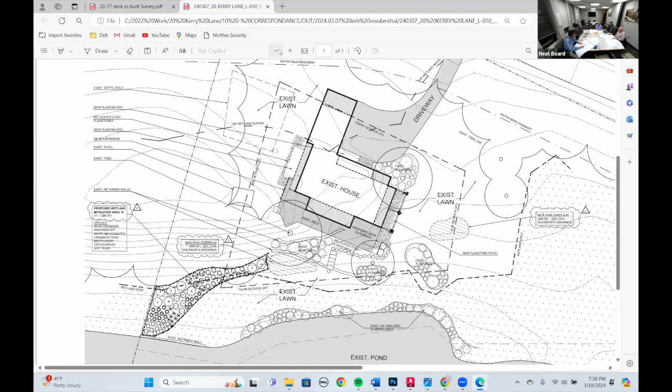Who did the original? The original boundary is, you can see it right here. No, who was the person that flagged the original? The original one, his name was Otto Theol. I had spoken with the owner, Mr. Rochlin, about the line. And I said, I'm just curious to get a copy of his report, right? Just to justify that line.

And to be fair to him, it's possible, because I don't think that wetland is necessarily tied to this. It was just another spot on the property. And that's why I wanted to see the report, because what month did he do it? When did he do it? It's possible that it was just missed. That's all. And correct me if I'm wrong, Dennis, but most of this is on the neighbor's property. But like we said, it's the tip of a carrot.

Who knows when we actually flag this thing? Even if it was on the neighbor's property, it would be a very tiny little tip. You think you would have seen it. It would create a buffer problem. Yeah. Am I correct, just estimating, that would then place pretty much the rest of the property in the buffer as well? Yeah, and the garage, which is part of the proposal, right? Well, that was just the point.

Yes, and per our earlier discussion with James McManus, there's two things going on with our development as well. This is why we're having this meeting tonight to discuss it, because we want to show our due diligence, and that we've been focused on trying to get everyone on the same page as far as this renovation. And so we want to flag this area. We do all agree that it's wetlands.

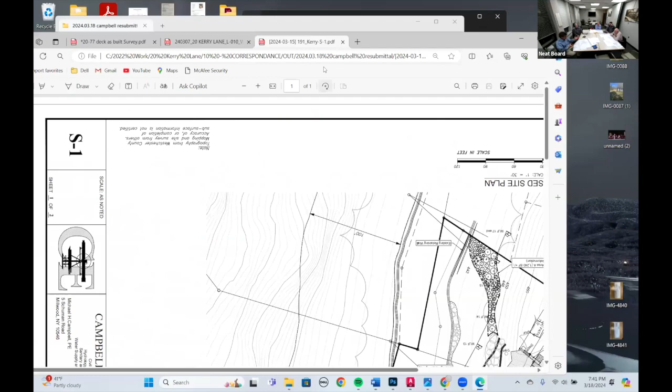And I told him, well, just about every pond, in my opinion, that I see in New Castle is man-made at some point. I said, the configurations are not natural. They happen to be within riverine or wetland systems. You're not gonna go dig out a pond in a dry area and then feed it water through a... Right.

Those, I mean, they were features that people wanted. They wanted open water. But what he was trying to, I think, say was that the features in those soils in the area outside of the pond, although they may be hydric features, they are relics of when they were submerged as sediments in the pond, but not necessarily indicative of hydric soils now.

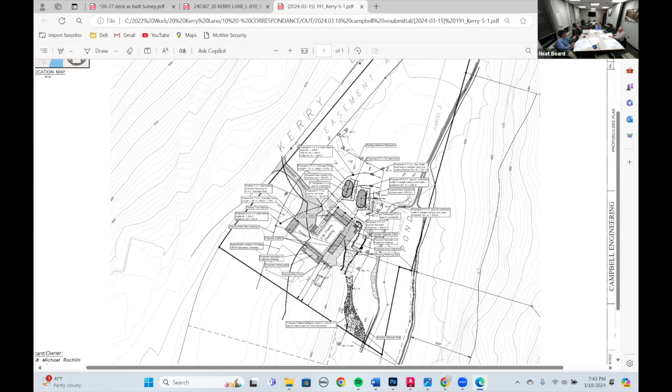Can you just say that again? Right, I mean, I myself in my experience hadn't... Does it matter? That's why I want to take a look at the manual. That's why I want to see, when we meet out there, what exactly he's looking to advance, and then if that would or would not change those conclusions at the end of the day, because I didn't have an immediate response to it, because I didn't investigate the area. I hadn't seen it. Well, he wants to present next month to all of you.

But the only reason why, from an architectural / engineering standpoint, and Michael Campbell can speak to this, is that we were planning on talking about our engineering from Michael Campbell today, because that is what was missing from our application last time. But this is a discussion, and correct me if I'm wrong, Dennis, does it move the needle 100%? No. But does it potentially give us a little bit more flexibility as far as where to put these rain gardens? If the wetlands delineation line is slightly different, do we potentially have some other opportunities?

Because from the client perspective, putting 2 big rain gardens in the middle of one of their only useful areas of lawn isn't very attractive, right? So if there are any potential other areas. Hold on, and to take a step back again, I believe what you're, and this is fine, I just want to corral this. What is up on the screen now was not submitted. Did you guys get a look at this? Was this submitted? I'm trying to remember. It is. Okay, so I did get it, okay.

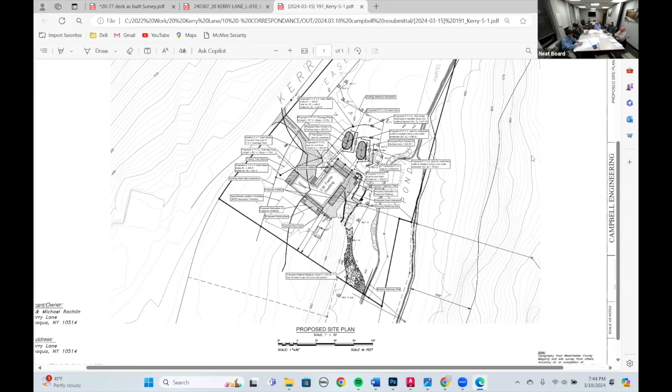So I think this reflects sort of a second edition. The first edition, as you saw, I think showed 1 rain garden to the side of the house and 1 rain garden to the rear of the house. But the problem that I was going to have with the rain garden to the rear was that, although the basin part could potentially be sited out of the wetland boundary as it is depicted now by Otto, the grading and I guess the little spillway for the overflow was all going to be disturbance in the wetland.

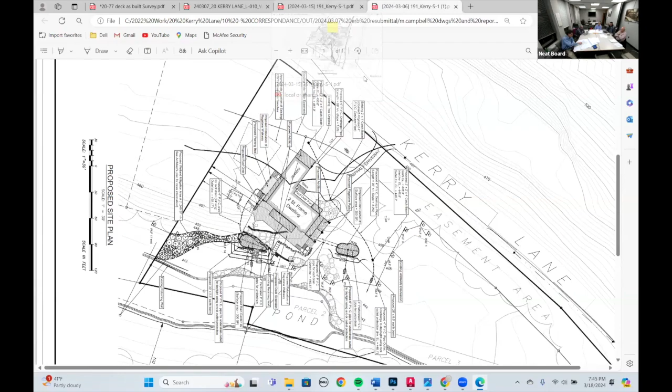And since stormwater is a pollution control device, you're really not supposed to have any of it in the wetland. So then this sort of became that. I'm sorry, she's showing the first one. Oh, yeah, I have both on the submission. This one is the second one. That's fine. And then the second one took that rain garden out and then in essence put the 2 side by side to the side of the property, out of the wetland limits as delineated by Otto.

Is it even worth looking at any of this if the wetland delineation is up for grabs? I mean, Mike Campbell is on. Mike Campbell, if you want to say anything to the effect. Well, I think the one thing that I thought might be of value is, I know at the first meeting, there was a discussion about looking to reduce coverage. Not necessarily reducing the project with respect to the living space, right? Right, it was the decking, patios, deckings and whatever. My question then at that point was, where does a garage fit into that discussion?

You guys had never vetted that, and that was something that I said to the applicant, if you did come tonight, that may be worthwhile, because now you're proposing for the first time in front of the board something that is in the wetlands buffer that wasn't prior, based on new information. And how does that impact the discussion? I said that to me is worthwhile to bring up. I mean, before we get, yes, I agree, Dennis. I think just to go back to where we were the last time, again, about moving the needle. Understood that there is this area we want to flag, and will, on the southwest corner of the property.

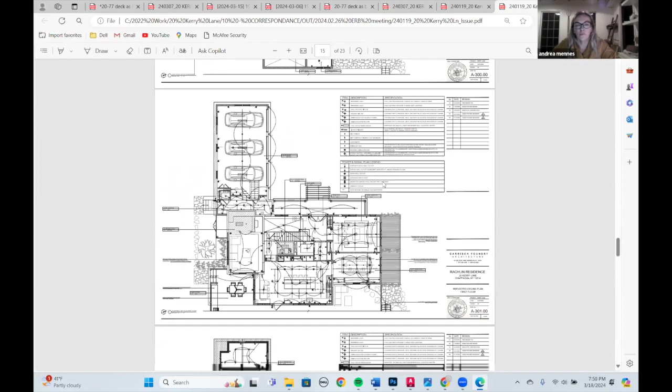We already passed the architectural review board, and let me just pull up our drawings again. Sorry. This is what it looks like now, if we take off the garage and don't do it as part of this application. I won't speak for the client, but I think we really want to do a small improvement to this house as far as square footage.

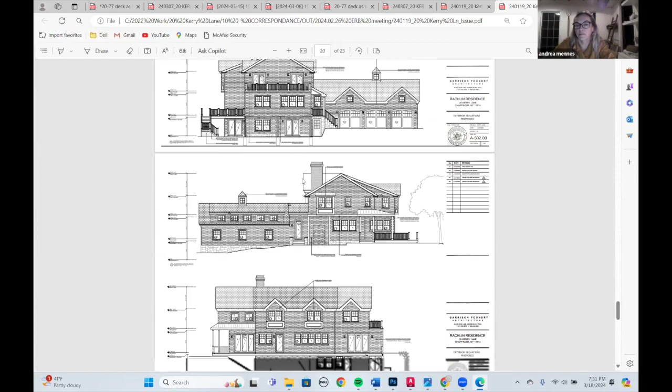And this is an important one, to have a 3rd bay, because they're going to be adding a lot of value and money to this project. And I don't think it's something that is easily taken out because it's an important feature. And I also think in general, the actual square footage that we're adding is not that significant. So if we look at it, it's a very small amount of disturbance actually for this project. You get it.

So besides the conversation, what else is up for discussion for this? Well, I think the only thing I'm gonna have to do is obviously consult at some level with counsel, because you have a wetland delineation here. That generally represents what was presented for this property in 2018, right? And then this one delineator has an opinion. There'll be a second delineator that's gonna have another opinion. I know what my role is, but does that change affect anything that's going on in here?

I think the only thing that it would change is that now the option for one basin to go to the rear of the property and avoid wetlands entirely, if indeed he has to do further investigation. But if Mr. McManus is just looking to pull this right up against basically the water line, then the rear opens up in terms of not being considered wetland. Isn't this the one we're looking at here? I don't think that is preferred by the client, so therefore it's worth investigating to see if they could put one of those to the rear of the property. So there's that question, and then there's the garage.

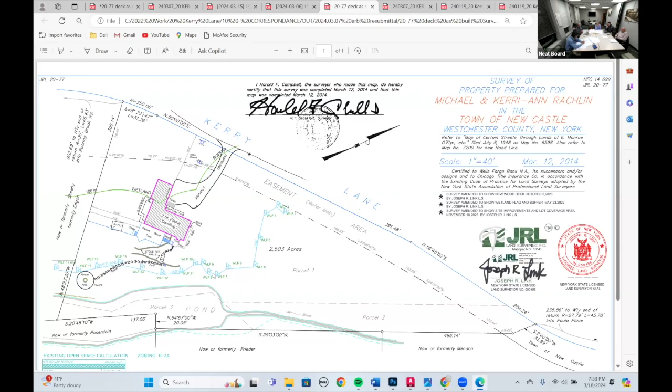Yeah, and then I think, as far as our mitigation that we presented here, our clients want this project to be a success, we want it to be good to the environment, we're happy to do whatever it takes. I guess that's why we want to do this due diligence for everyone. And if there's the potential to add more wetlands mitigation to offset this new area, we would be all for that. And I know James was going to recommend some areas that we could potentially suggest as mitigation areas.

And then the line delineation is a to be determined issue. And I guess largely this whole discussion is almost a to be determined issue for next month. But we do need to look at these things, and we want to be diligent, and our clients want to build an offset however the board and everyone deems proper and necessary.

Right, and just so that you know, what Mr. Horowitz is saying, this is the exercise when it comes to wetlands. All regulatory agencies, the planning board, the ERB, DEC, Corps of Engineers, whatever. The phrase is avoid, minimize, mitigate. So the first option that's always looked at is, does it have to go in the buffer?

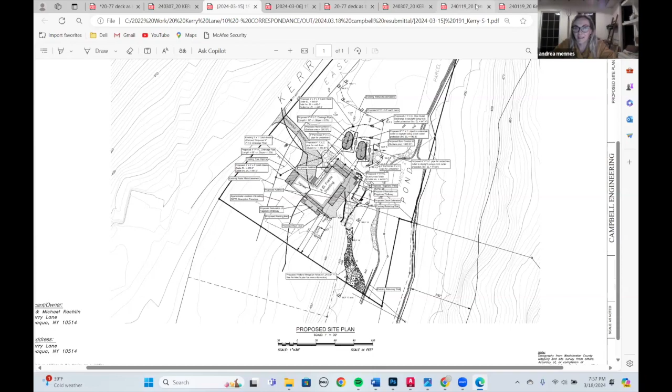I mean, if we think about it, it's deceiving because you think, here's this big house, but really what we are actually adding and disturbing for this is so small. It's 1260 square feet. So the mitigation area, I'm just clarifying, we had it as 1,240 square feet, and I thought that didn't include the fire pit and the proposed garage addition, because that was out of the buffer.

No, it's all here. So basically this diagram shows what we're trying to also describe, that much of this area is already disturbed area. So everything in dotted is brand new. So the garage is one area where it's not over existing.

But, and we did update this, it was 1,240, but if you recall last meeting, we landed at the end of the meeting where we wanted to add the fire pit back in because we can't count that. So we added it. So this is the total square footage when you think about it. But I'm just trying to get this straight.

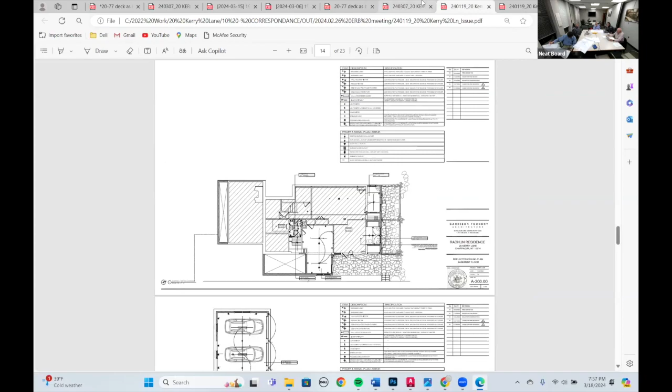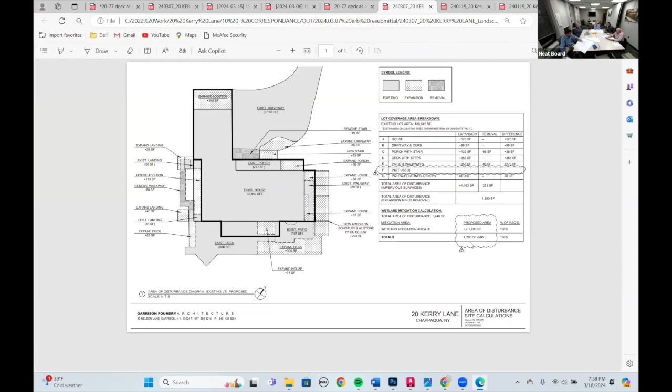I'm looking at the plan from 1/19/24, and it shows kind of the same configuration of the mitigation, and it lists it as 1,240 square feet. And then this submission, which we received, I guess, March 8th, that was stamped, it's the same configuration, and it's 1,240 square feet. So all I'm asking is, the math's not resonating with me, because it's the same before the garage and after the garage. You know what I'm saying?

Our first submission was in December, actually. Right, but this is the January revision where we didn't have the reduced coverage. Right. We didn't have the meeting in February, and then the last meeting, we discussed the 1,240. And you guys had a mitigation plan that accounted for the garage, even though the garage wasn't in the buffer. We always accounted for the garage as our square footage, as our total. And you can see it here, we have the numbers written.

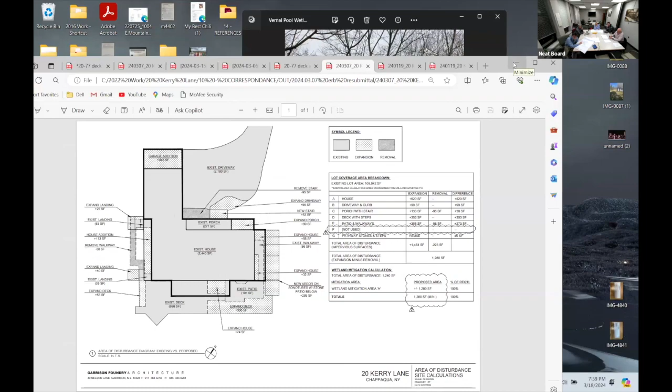I'm also a little confused by the removal stats. You're saying that you have 95 square feet of porch with stair being removed and 88 square feet of patios and walkways being removed. And you're showing a total removal of 223 square feet. That doesn't add up to me.

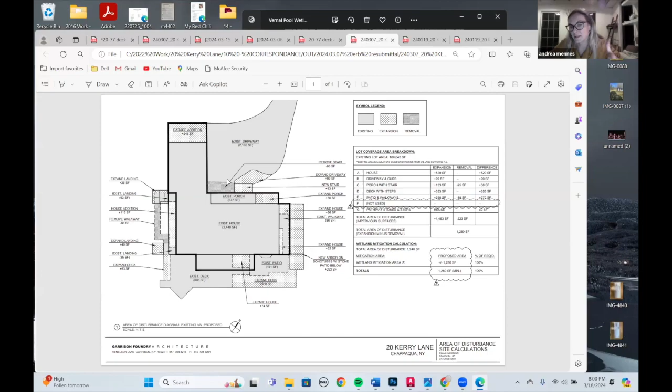So we're basically describing our diagram here. This is what we removed from the initial application, but it all totals into the new amount. It's a diagram showing you from where we began. We reduced the pergola, and we removed this, and we also removed this because, if you recall, our first application was like 2,200 square feet, and we were counting areas that were already disturbed. So this is a very precise calculation showing what we are actually disturbing as new disturbance for our construction. And we reviewed it at the last meeting.

If the garage wasn't in the wetland before, why would it have been included in the disturbance square footage? Because we have it as the total disturbance. Even though it was outside of the buffer? You were counting that? Yeah, we were counting it. Could you go back to that other drawing? So the garage is under House, A, B, C, D area. It's A? Yeah, it was always in there. We always included it. Okay.

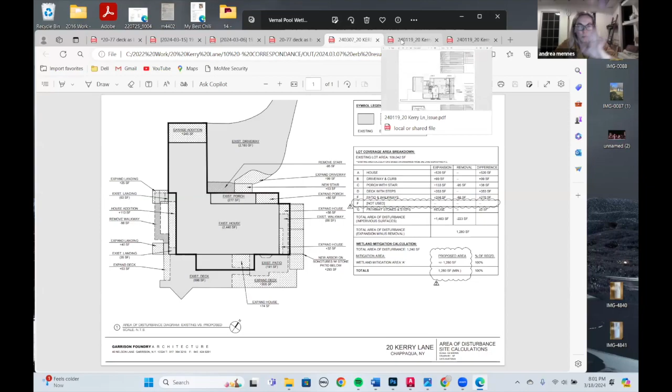40, 220, 520, okay. We're trying to show you, I guess that was the point last time when we spoke, trying to demonstrate what the project is actually disturbing, because that's what we're here to talk about. And we did include the garage even though it wasn't in the wetland, so it's just a total disturbance number. And when we look at that, it's not a big number. And obviously we did already go through an exercise of reducing it.

We understand that there is this new area over here. And this was of his own volition, the client can correct me. He came out and immediately said he didn't agree with this delineation. And so we are now going to look at that. So we can't make any firm decisions on anything until we have James McManus and have this discussion about this area. And that will tie in Michael Campbell because he can finally talk about his plans. So a lot of things are hinging upon this.

And obviously we have this open-ended thing. We still need to flag and mark this new wetland. We don't even know how big it is. I do think it's quite small, if that matters.

Hey, Mike, can you mute?

This meeting ID does not exist. Please re-enter your meeting ID followed by pound. Mike. You forced me to do that. Mike has problems this afternoon too.

But in general, we're here because we also want to be continuing productivity with the process of looking at this project. We started in December. Hopefully we're not going to be here in August.

You know what I mean? Enter your participant ID followed by pound. Otherwise, just press pound to continue. Can we mute him? Mike, can you mute by any chance? You are in the meeting. Michael Campbell. There are 6 participants in the meeting. This meeting is not being recorded. Must hear us. Okay. Now we can hear. Now, Mike, you have 2 audios going.

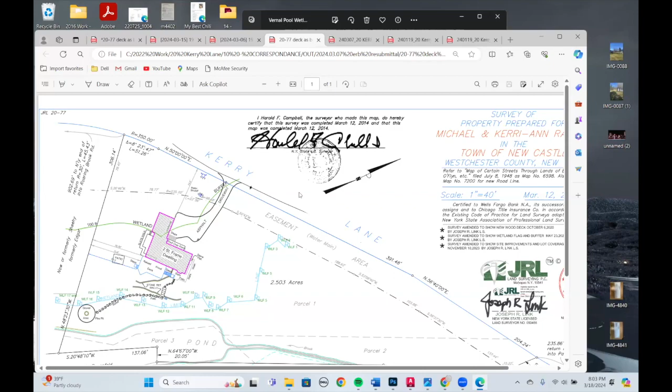All right. I feel like I'm in a science fiction movie where I'm in a cave. This is nice, in a futuristic society.

So the one thing I would say is, I know James McManus, he's a soil scientist, and he mentioned having observed this before. For whenever we meet, if he has other examples of where he's done this for clients, whereby areas, I don't even know how to phrase it because it's new to me, met relict hydric characteristics that were from a former situation, and therefore the area now is not functioning as a wetland, soils, to that language. If he has other examples.

That would be helpful, yeah, if he's done it on other projects. And if he ever really had good concurrence from the Corps of Engineers on that determination as well. This might be above my pay grade, Dennis, as far as understanding these, but I get you. I think he came out to look at the corner and he's really smart. It seems like this is kind of what he does. Does he have examples? We'll have to ask him. You know what I mean?

Because he said he encountered it before or he's seen it before, and it would just be helpful to me. I'm not doubting him or denying it, it's just a new concept to me, based on dredging. I've seen it before for agricultural wetlands, that's a different dynamic, farmers have manipulated hydrology. This is dredge spoils next to a wetland or in a former wetland, now not a wetland. So I'm just curious, that's all. No problem. I'll ask him and I'm going to link you guys anyway. I know you guys are going to be going out there and looking at it together.

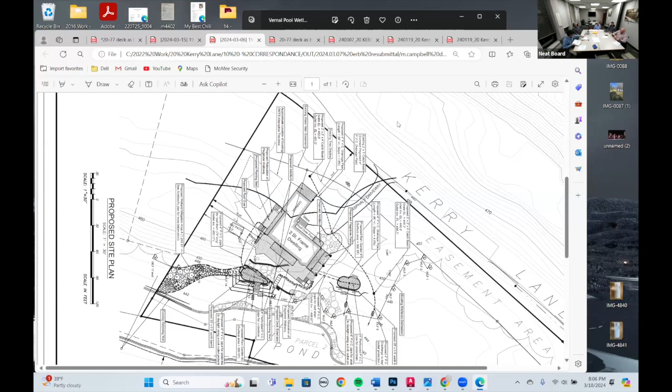All right, moving on to the next agenda item, 19 Crow Hill Road, another returning application. Who is here for the applicant? The applicant himself, arriving in person. All right. How are you? Good, how are you? Hi. Am I okay to begin?

Please. Okay. So based on our last meeting, the board requested that my engineer and myself do a site plan showing some items consisting of a stormwater mitigation area, a topsoil, a soil stockpile area, silt fence, erosion control, and an egress and ingress area to the rear of the property, where the work's going to be done for that 8-foot rear addition.

I made a little larger print if anyone wants to take a look. Yeah, I forgot to pull my copy of the room, but I do remember seeing it. Hey Dennis, on the agenda, it has a proposed 4,400 square foot rear addition. Yeah, we brought that up last time. And what's the actual size of the addition?

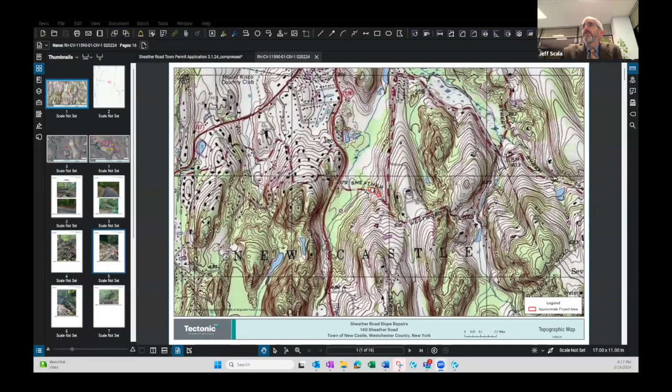Okay, everybody can see my screen? Nope. Yeah, it's on screen. Yeah, we do. What screen are you seeing? Are you seeing a map? It's a USGS map, yeah. Okay, great. First of all, this is a quick USGS; the small red shape in the middle, that's the project site. A little bit better view from Google Earth or Street View.

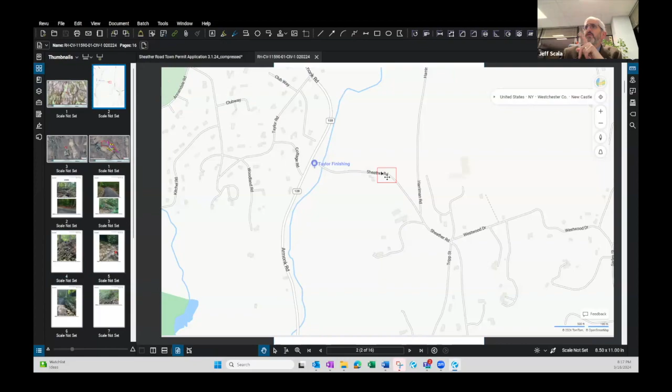This is about 1,200 feet due east of Armonk Road. And here's a little bit aerial view of the same location. And then zoomed in. We took a series of photographs, numbered 1 through 8, and I'll go through those really quickly, just to give you an idea of what the site looks like. Photograph 1 on the top here is looking up at the road from the stream elevation. You can see the erosion on the slope, and this was a direct cause of the storm a couple of years ago that created some flooding in the area and erosion down the slope. And the slope's been failing over a long period of time.

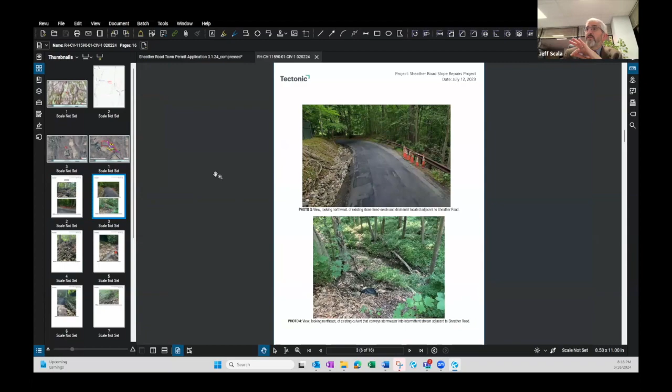Second photograph is from the road, looking at the same location. Third photograph is looking down the road. You've got the existing swale on the left-hand side, which was damaged under the same storm. And the photo on the bottom here is looking from the road down the slope toward the stream. You can see the existing outlet here and all the erosion coming down here, and then there's a stream down at the bottom here.

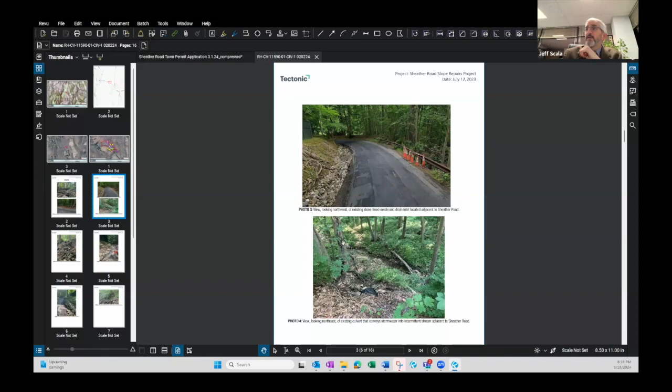This is looking up at the erosion on the slope underneath that outfall pipe that crosses the road. And finally, the same swale, and this is the inlet of that pipe along the swale, which runs across the road. Anybody want me to go backwards or spend more time on the photographs? Good. This is looking west toward Armonk along that swale. You can see the erosion in the swale, which is part of the storm damage. The town was in there, did some temporary repair work to the road, but it had been a long-standing issue.

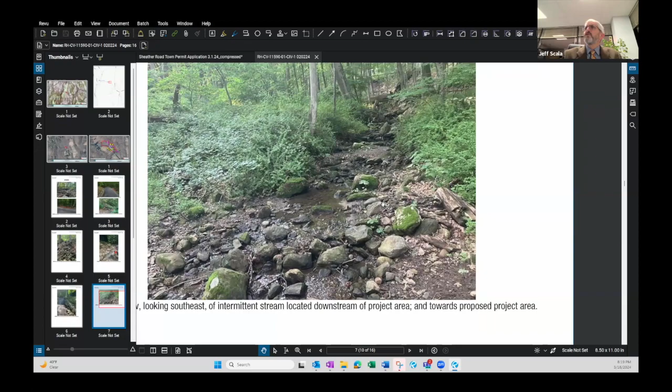And again, this is about 150 feet down from the location of the slope failure. Let me zoom in here. And that slope failure is up in this area. And this is the intermittent water course. This was taken sometime last July, just to give you an idea of what it looks like. This was after a rainstorm, so it doesn't usually run this much, but it definitely does run.

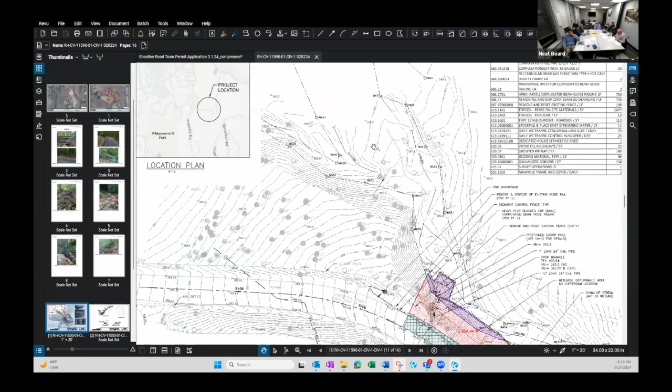And the proposed slope repairs include basically excavating out the slope and then repairing the slope with a gabion riprap. And the four different colors here: the green area is roadway repair work. So we're going to go in there and fix up the road, because the road is sloping and failing down the slope, because the slope failure is not supporting the road currently. So there's cracks in the road. So we're going to go and reconstruct the road with the green cross-hatched.

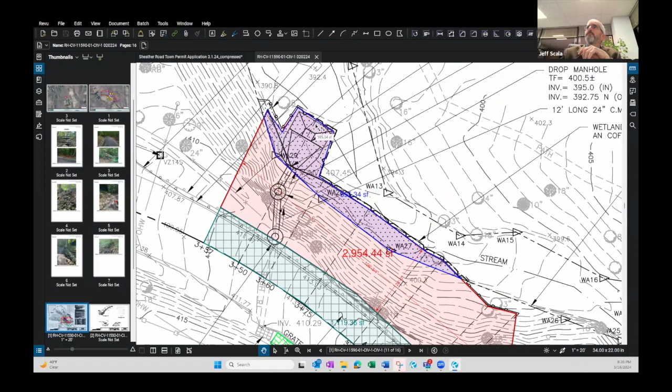The red area shaded in there, that's within the 100-foot buffer, but it's outside the wetlands. And the bluish, purplish area, that's actually wetland impacted areas. Part of the proposal for this project is to pick up the existing crossing culvert with a manhole, run a corrugated metal pipe down a slope, and then use a drop manhole, come out with a flatter pipe into a preformed scour hole in this area here. Again, all the purplish blue area, that's all within the wetland areas that's defined by our soil scientist and wetland agent.

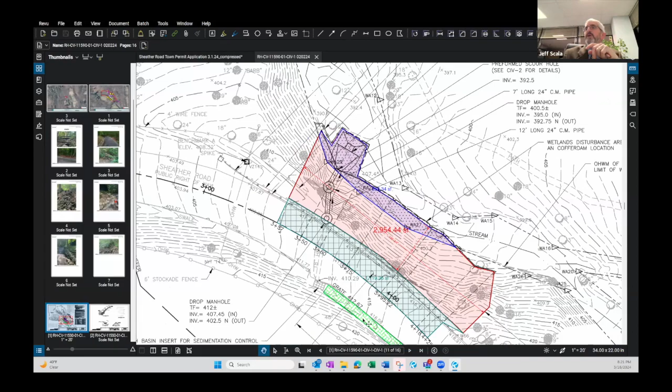From an impact area, the wetlands impacts in the area that are permitted, which includes the preformed scour hole, slope protection, gabions, temporary sedimentation control, cofferdam, and so forth, is 595 square feet. The area within the buffer, including the road work, which is within the buffer, and the swale is roughly, what do I have? Almost 3,500 square feet.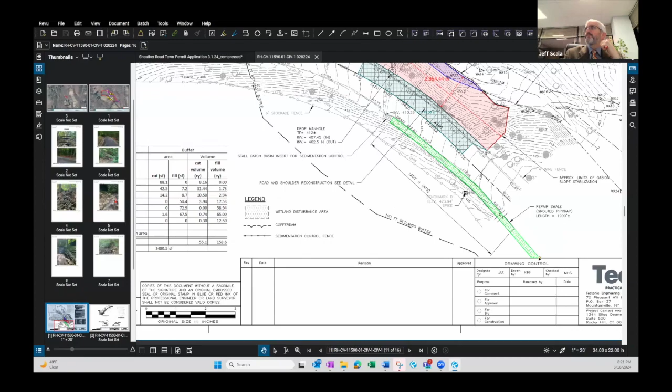And then finally, we're repairing the swale, basically removing all that rock, reforming the swale with a 1-foot bottom, 2-to-1 side slopes, and then grouted riprap to create a permanent, stable swale. And that's 1,200 feet, which runs from this inlet almost all the way up to the intersection of Armonk Road.

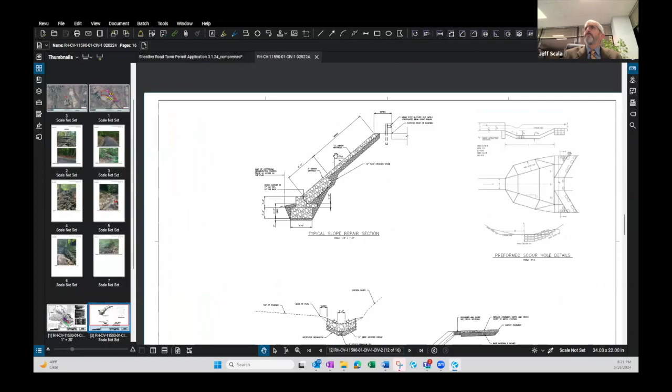For the slope stabilization, what we're doing is we're excavating the slope down to a consistent elevation, consistent shape, over-excavating a little bit, putting a crushed stone blanket and geotech membrane, because there is water seeping out of the face of this hill. There's rock roughly 10 to 15 feet below the ground surface. And then we're lining the small stone with grouted gabion riprap, basically a box of rocks.

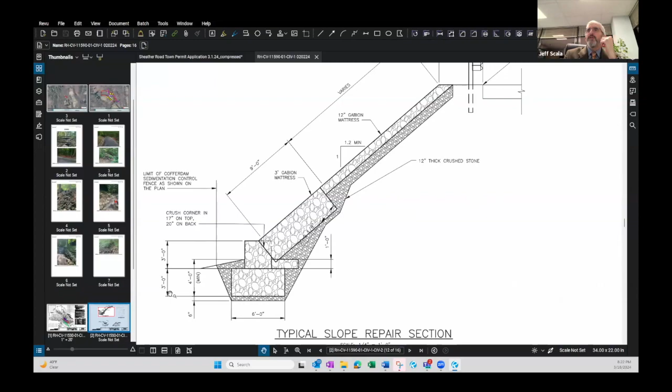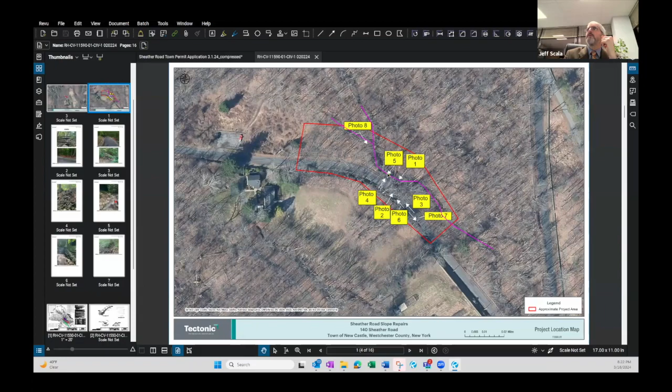And the reason we went with gabions is we're proposing a pretty steep slope, 1.2 to 1. And then we're toeing this in to account for any potential erosion caused by the stream, because the stream has a bend right here. So the stream is running along this path here. It takes a bend and it's causing erosion in this area. So that's kind of what we're fixing, trying to deal with this erosion at the outside of the bend.

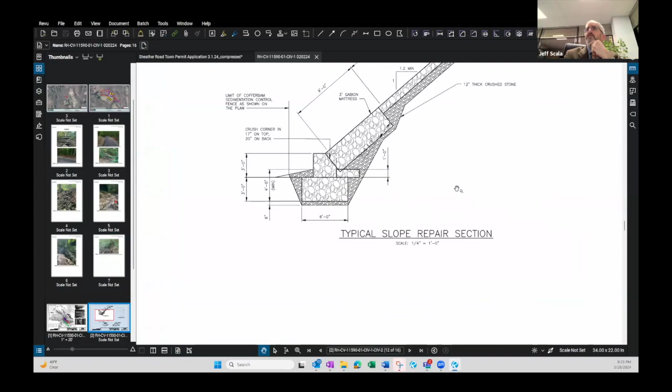So will you be rerouting the stream during your work? We are not proposing to reroute the stream. We are proposing a cofferdam, either sandbag or driven piles, in this location. I'll zoom in a little bit here. Just to isolate the work zone from the stream. If you dam up the stream, you're going to... Just bypass it. The stream runs in and out of this page.

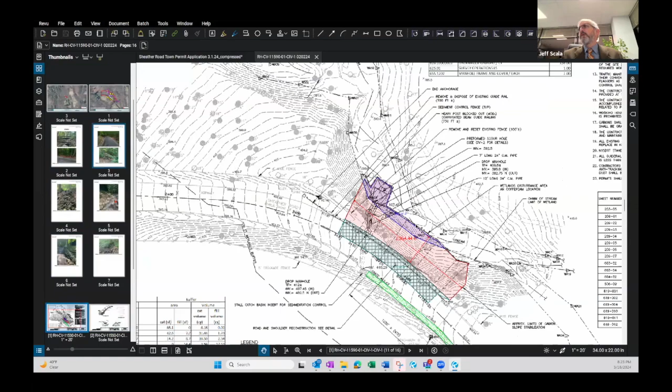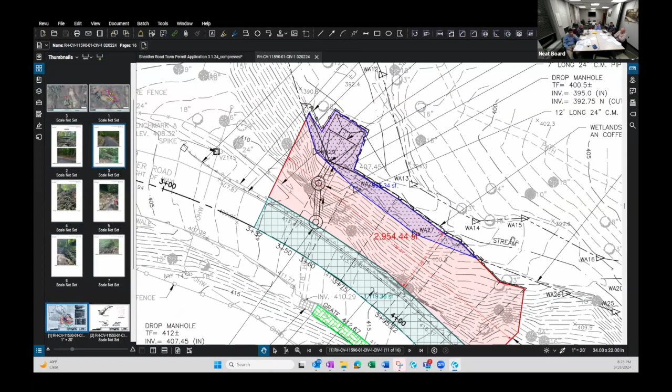There's room on the, let's see, let me show you. Go back to the plan here. It'll be parallel, yeah. The cofferdam is going to run parallel. And this triangular shaped line here, that's the cofferdam, and it runs parallel, and the stream runs this direction. The big gabion at the toe of the slope, how long does that run? It runs the whole length of the slope stabilization, which is about 105 feet long.

Just curious, where does that tie into where the stream changes shape? We're running the stabilization all along here. We toe it in just to make sure that nothing moves down in the future, with water flowing against that slope, because we know it's coming around this bend. The stream naturally constricts in this area, plus the bend caused this slope to erode. That's where you get the scour. We analyzed the big scour in this area, and then we analyzed the rest of the slope. We had to extend it to make sure the whole thing stayed stable long-term.

And then those are just precast drops? Yeah, this is a precast manhole. This one's relatively shallow. Then we chase the slope with a corrugated metal pipe here. Then we use a drop manhole here. This one's quite deep, like 20 feet deep, to create this pipe outlet to minimize the flow velocity coming out of this pipe.

Silly question, but why corrugated pipe as opposed to DIP or plastic? We looked at concrete, and the issue with concrete is the velocities get extremely high, so any grit you carry will wear it out. And then plastic pipe, same issues. We were trying to minimize the velocities, and we were trying to lock the pipe into the slope. Anything like a concrete pipe is smooth on the outside, so we'd have to put a big hunk of concrete to keep the pipe from sliding down the hill over time. Corrugated metal locks into the soil, so there's less tendency to do that. Okay.

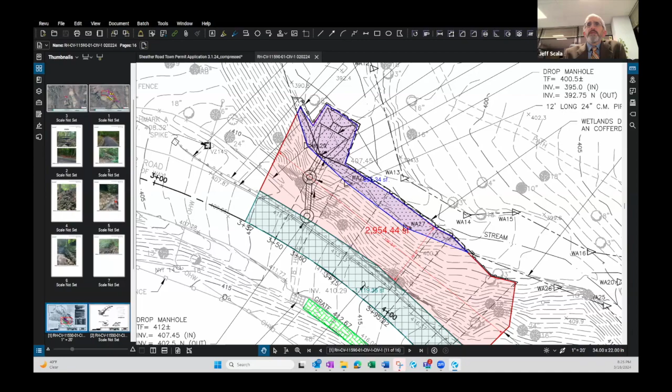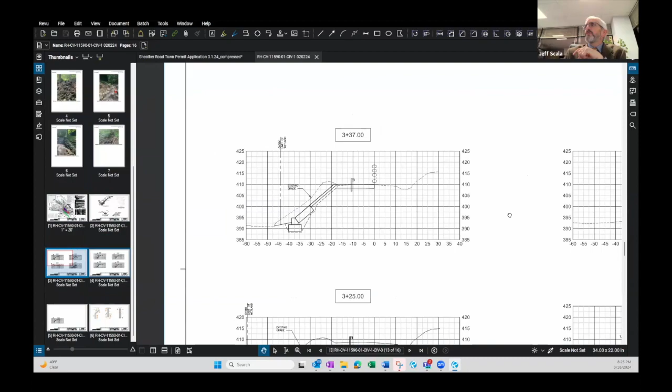Let's see, do I have anything else to share? I can show you cross sections if you want, see? So this is a cross section, this area where we're excavating and laying the slope back parallel to the existing surface. In this area, the toe of slope is very close to the original toe of slope. In this area, it's slightly filled, but up in here, we got some cut.

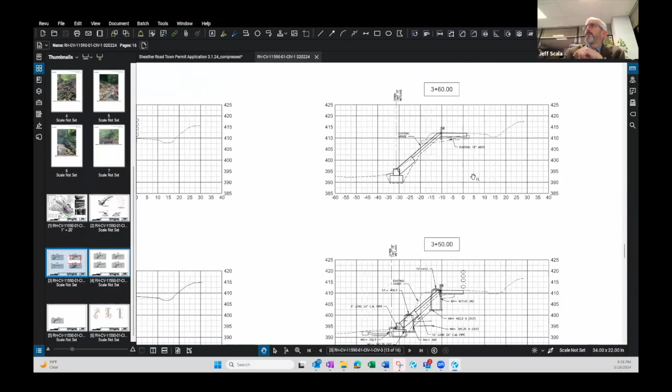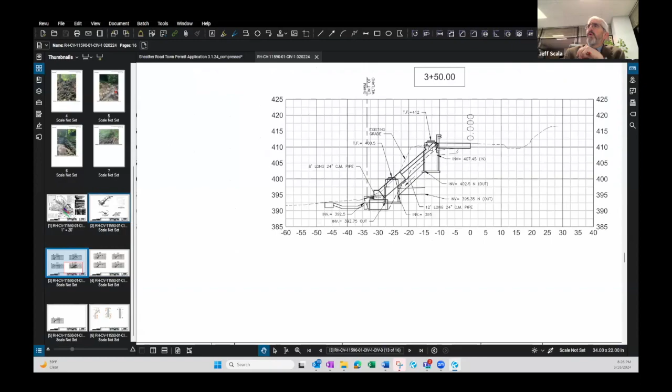And then this last one is showing the manholes, drop inlets and stuff, and then the pre-formed scour hole. We're using standard New York State DOT sedimentation and erosion controls. We are proposing to top dress the gabions with topsoil, toss some grass seed on there, establish it just so it's green, and then basically let it go wild after that, because it's not a mowable slope.

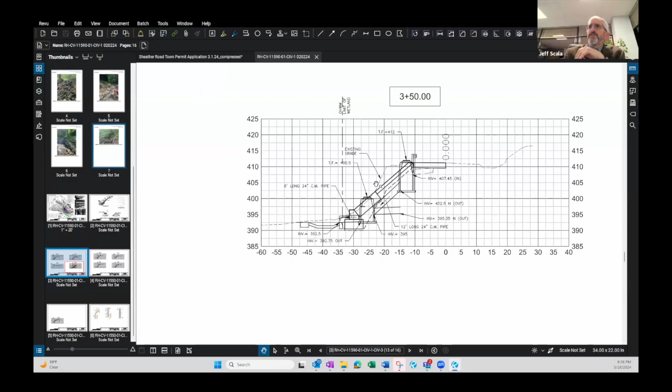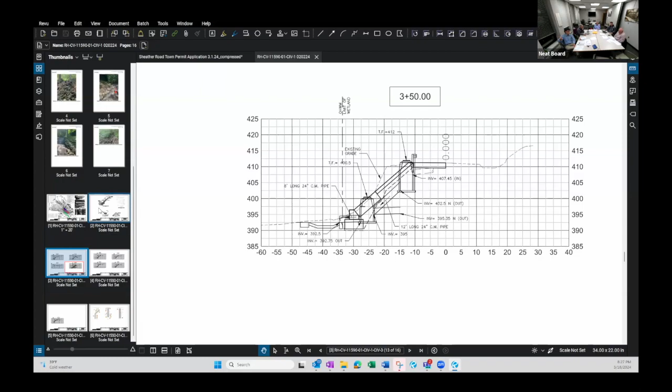You'd be better off with those mats. Yeah, I was gonna say, it's pretty steep. Yeah, we're just gonna filter topsoil into the box of rocks, just so we can grow some grass. That would be one for sure, and either you could seed it, or sometimes they sell the mats with the seeds. But to his point, I didn't have a chance to speak to Jeff directly, but we've been leaving voicemails, because I spoke with the town engineer and commissioner of public works here, to try to, as best we can, soften that.

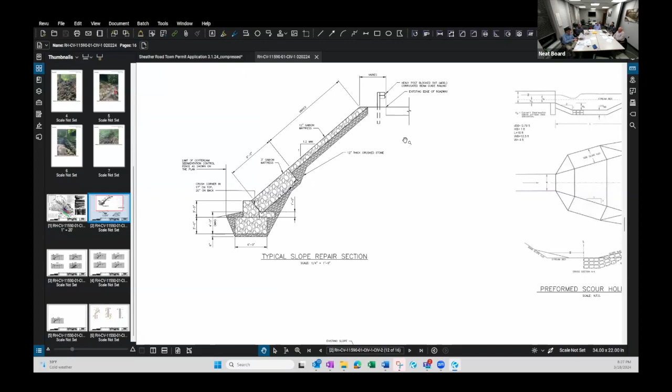Although the town engineer doesn't like the term bioengineering, because it's not truly engineering, all these projects have that element, and for the slope, that's basically a limited approach. Jeff, in the meantime, since we haven't had a chance to talk, I was reviewing some of these documents on bioengineering, and it's interesting: the problems with this roadway are top down, meaning the flow is coming from higher elevations and shooting down, right? Correct.

When you read a lot of these bioengineering articles, which don't get me wrong, were great, and I'm still gonna try to implement one here for this project, they're all concerned about stream bank erosion. So it's a totally different approach. They'll take root wads from trees and jam them in backwards, and you want the flow to hit the root wads to slow down the velocity of the stream. It allows deposition. You want that deposition.

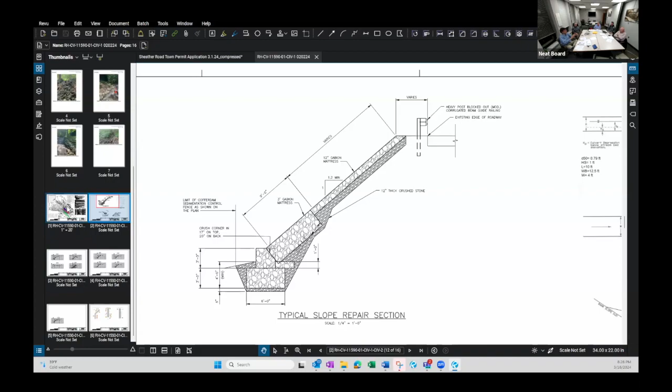So maybe it can even accrete and build up to a point where it'll establish vegetation, but that ongoing, high-low iterative drop process over time creates its own natural approach to stabilizing banks and reducing erosion, because as we know, just dropping the hard stuff may work in the spot, it may not, but it definitely makes things worse downstream.

So the other item we discussed that I think is fairly simple and could work here is at the toe of the slope, in the wetland, in the stream, you could install coir logs and do live plant staking. Willow is a popular one. It's like how you kill a vampire, this little stake, you just jam them in, and there'd be enough moisture down there, and the coir log would serve as the substrate to let the rooting start to happen, and that'll degrade over time.

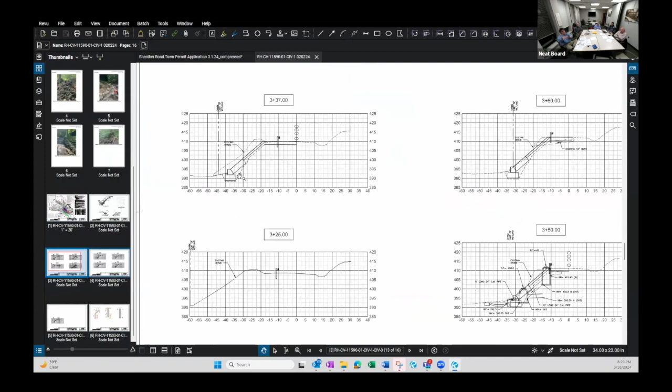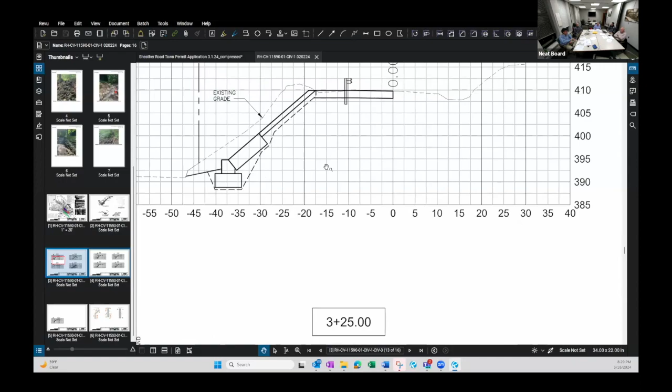But by then, willows grow pretty quick, so you'd have this nice effect of the slope being easy to maintain, herbs, not worrying about dislodging rock with woody roots in the gabion mattress. But in the stream bank itself, there's definitely a way to improve what would be just the hard bottom when it gets to the stream. Again, I'm not worried that this intermittent stream is the cause from the road stability and engineering perspective, but we know this is a town project. If it was a private applicant, we all discussed internally that you still have to put on that good face, right?

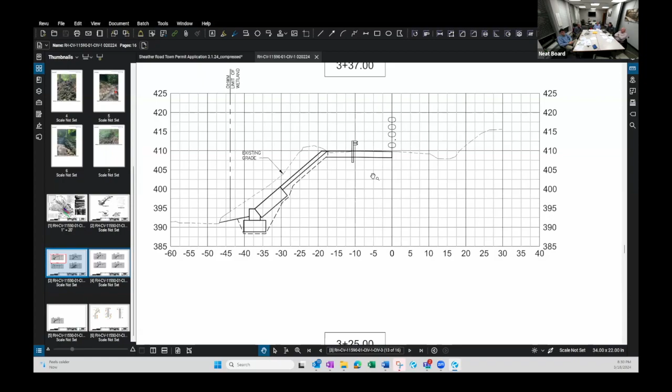Yeah, look, you can't just... Would that change the elevation that the outfall would go at if you do something like that? I probably wouldn't look to necessarily mess with the outfall location per se. I was thinking more just sort of the run of the bank. I would look to try to minimize anything there, just not to impede that sort of discharge.

Because as Jeff mentioned, if that is controlled as such, the hope is that the velocity isn't gonna end up scouring its own design, right? Are you talking scour from the stream? Or you're talking about scour from the outfall? I'm talking when you get to that outflow portion, I wouldn't worry about enveloping or wrapping that in coir log, so to speak.

In other words, I would want that to be... You're talking, Dennis, about this area? Exactly. I would want that relatively open, but to the remaining length that is just touching the slope embankment, I think there's potential for improvement there.

That's all. I don't know if you're familiar with this whole project, Dennis, but there is a concept that we developed to do a treatment, basically a low flow, 24-hour storm directed into a system out in this area, and that was just beyond the scope of the project, because I believe the town is using some FEMA money for this repair work. There is a concept out there, and that's one of the reasons for this manhole here.

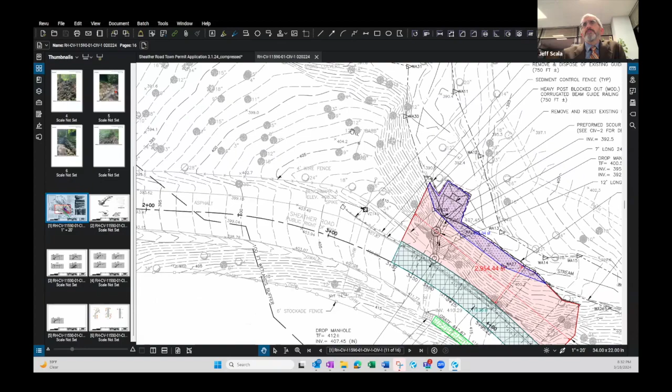Right, and I was gonna say, that's more water quality directed. Yes, water quality. Yeah, I was just looking at the habitat right there where we're in the wetland and obviously making a direct impact. In discussing it with Bob, I said, look, I'm not trying to change anything that's going to affect or impact the engineering. But if I can get more into the icing on the cake category and not just make it look good, but function.

And function for me, I'm talking wetlands ecological function, not function as in the design. Down in this area, I don't see a problem. Honestly, that would be great. I think there might be some opportunities over here. But in this area along here, this water course is pretty tight right here. Anything here, you're gonna restrict the flow and either you're gonna create erosion on the inside of the curve, or it's just gonna be a debris trap.

Well, possibly, then that's something we should look at, but I'm talking logs and plants. I don't know if that would necessarily create that. I'm familiar with the root wad scenario because I've used them before. I'm not looking at root wads, that's too much. I agree. I told Bob this before, short of playing around with this slope, because he started saying about planting trees in the slope. I'm like, we can plant trees, but they're not gonna survive. I would not look to do trees there either.

Literally at the toe of the slope, there's opportunity to, how best can you try to quote unquote plant something, right? You can't just drop a plant in and hope that it's not a high flow event. So that's why I was saying the logs and the stakes serve as a stabilization and a planting substrate, to achieve that goal without impacting that design. It's just an opportunity to plant, that's all. Honestly, whatever you guys want. Something to look at.

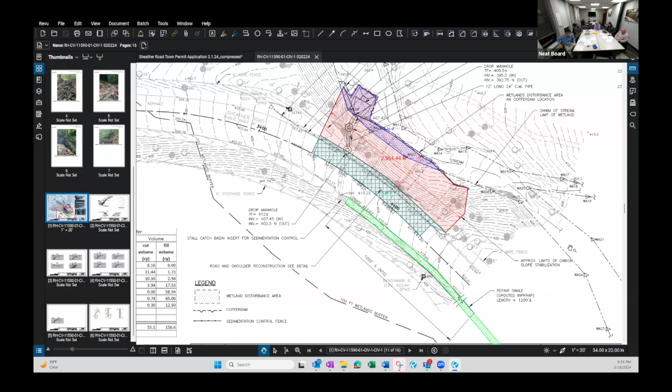And the only correction: in this part of town, it's a 150-foot buffer, which doesn't materially change anything with respect to the project. It's just a note on the drawing, that's all. Do we identify the 150-foot buffer on here? Oh, we do, don't we? That's supposed to be 100. 200, 150. It's in the environmental protection overlay district, so that's why it's 150. Okay, we can move that line over. That's pretty easy. Doesn't change anything material. It doesn't, yeah. If that represents 100, it does nothing other than depict where it is in the town relative to our wetland code, that's it. Okay, easy enough. Any other questions?

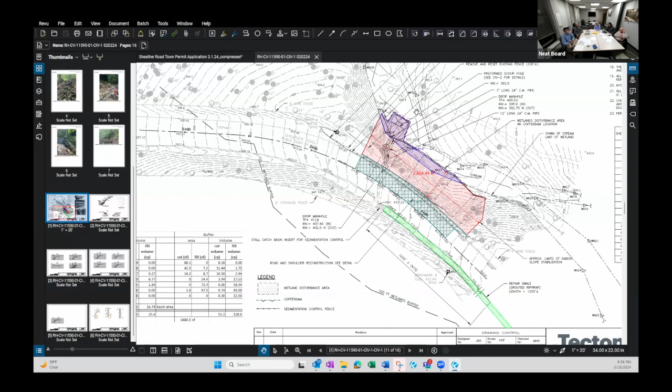Dennis, do you want to work with me to come up with a planting here that's acceptable to you and the town? Yeah, kind of what I illustrated. I'm trying to keep it simple and keep it green, so even if we needed to use the smallest coir logs, so that we don't necessarily worry about creating the clogged artery effect in that spot. And the willows are the most popular, we just drop stakes in and figure out what spacing would make sense, and that's it. Can I ask a blunt question? Of course. Would the commission be okay with approving this with Dennis's input on planting this area that he's talking about? Yeah, yes.

Just one other curiosity question. Is the work being done from the street with a long reach machine to get down to the toe? Well, honestly, that's the concept and how we came up with this thing. We work with contractors a lot in reference to long reach machines. We typically don't dictate how they're gonna do it, but he's not gonna be allowed to track down into the stream to do this work. He may decide to bench it in so he can use a smaller machine versus something with a 60 or 70 foot reach. That's a pretty big machine. Yeah, but the machine will be sitting in this area to try to keep the lane open. Just when you set the specs out for that, whatever they do to try to keep it up high. Right, understood.

And I'm sure you have all the things with spill kits and fueling requirements and stuff like that. Yeah, well, it's funny, from the submission you could see where Tecton ended and the thickness of New York State DOT specifications began. To Jeff's point, it's not just these 16 pages. We referenced the entire New York State DOT specification, which covers everything under the sun. Glad you didn't print that.

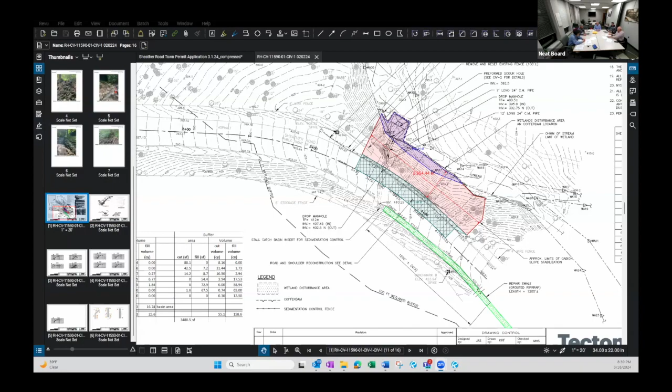All right, so that's everything on the agenda. Do we have anything else, Dennis? No. Obviously, going back to our first application, they're in a rush to get approval because they're looking at shovels in the ground over the summer. But Michael Campbell, who didn't speak much, is the engineer of record, and part of the reason they need to propose rain gardens is there's a lot of moisture on that property, so subsurface is not gonna achieve it.

It just seems strange that because there's pushback, let's find another engineer to change the wetland. Well, again, as I said, I'm not saying anything new in their absence. It was the first time that I had heard that argument.

A reclassification. And how does that help them, the reclassification of that line? I think the significance is that they would be able to put a basin to the rear of the property, not in wetlands, if that line gets closer to the pond. I see. But it doesn't change the fact that the entirety of the project looks like it's gonna be within the buffer, no matter how you swing that. Absolutely. So it's just the placement of the basin?

Yes, because I believe the applicant was not in favor of having two basins side by side on the side of the property. It takes up a big area. It's utilized by the family, et cetera, and if that's gonna be two basins, or two rain gardens, I could see that being a problem. So is that garage really a non-starter on this one? Does that screw everything up?